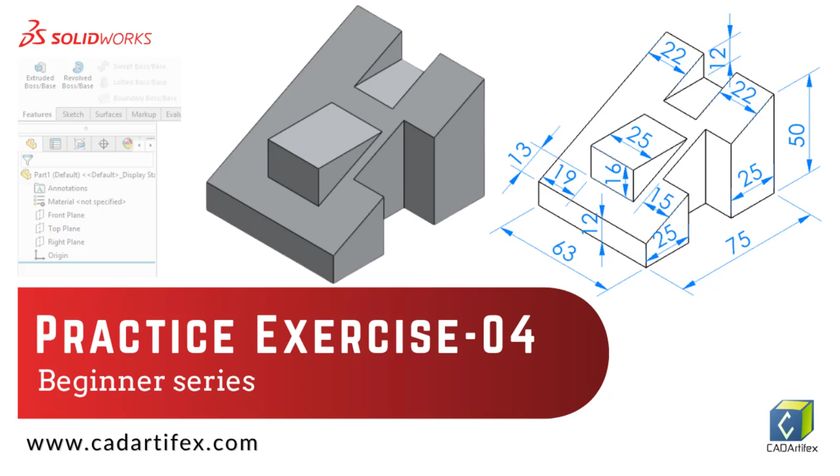Here's practice exercise 4 in our SOLIDWORKS Beginner series. This series is perfect for beginners or anyone looking to strengthen their 3D modeling skills. We'll start with the basics and move step by step into simple 3D models.

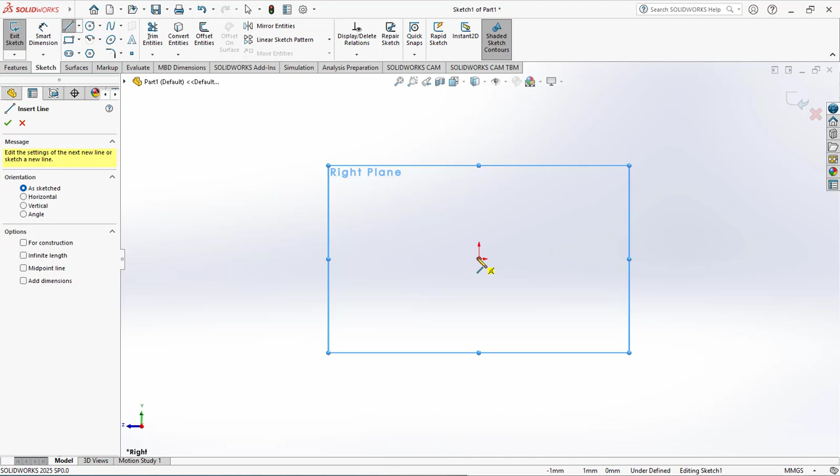Now let's start by creating the base profile. Go to the Sketch tab and select the Line tool. Click once on the origin to set the starting point. Then move your cursor to the right, and when the horizontal constraint symbol appears, click again to place the next point. From here, keep connecting the lines to form a closed sketch, similar to the shape we have shown in the drawing. Now let's add the dimensions.

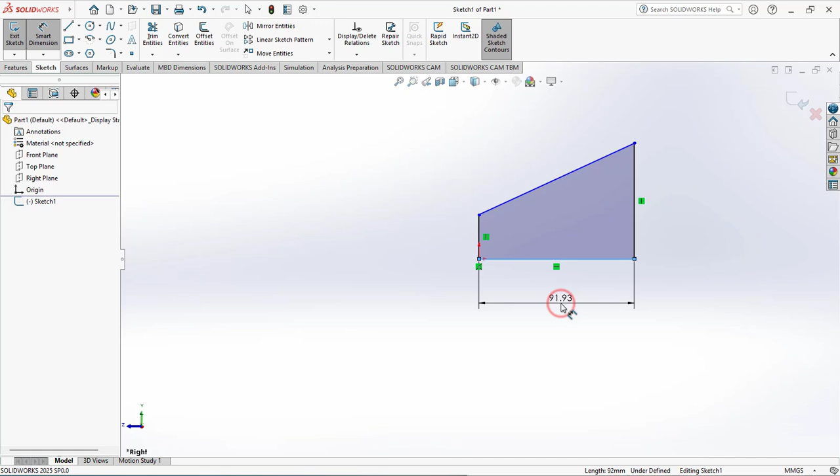Activate the Smart Dimension tool. Click on this horizontal line and set its length to 75 millimeters. Then click on this vertical line and set that to 50 millimeters. And finally, click on this small vertical line and set its length to 12 millimeters. Once you've added all the dimensions, take a look at the sketch. It should now turn fully defined.

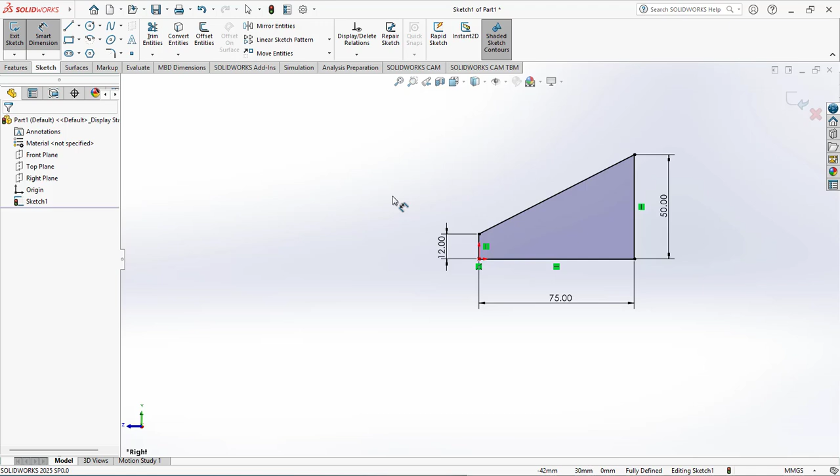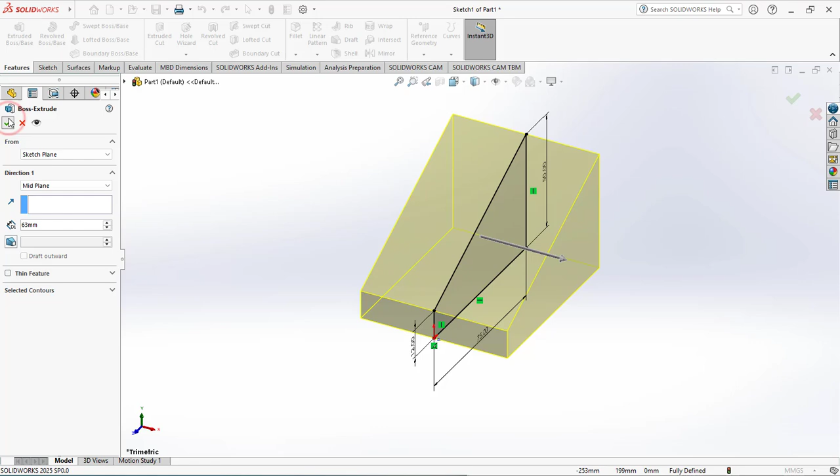Now, let's convert this 2D sketch into a 3D model. Go to the Features tab and select Extruded Boss Base. Under Direction 1 drop-down, select Mid-Plane and set the extrusion depth to 63 millimeters. Then, confirm with the green tick. And that's it. The base feature of our model is complete. From here, we'll move ahead and start building the rest of the parts step by step.

Now we'll move on to creating this cutout section in the base feature. If you take a look at the drawing, you'll notice this rectangular portion that needs to be removed from the center. You'll see that only the width is clearly mentioned, which is 15 millimeters. The length isn't given directly, so we'll position the cutout by taking 25 millimeters from this edge and 25 millimeters from the opposite edge. That way, the sketch stays centered and properly aligned on the base.

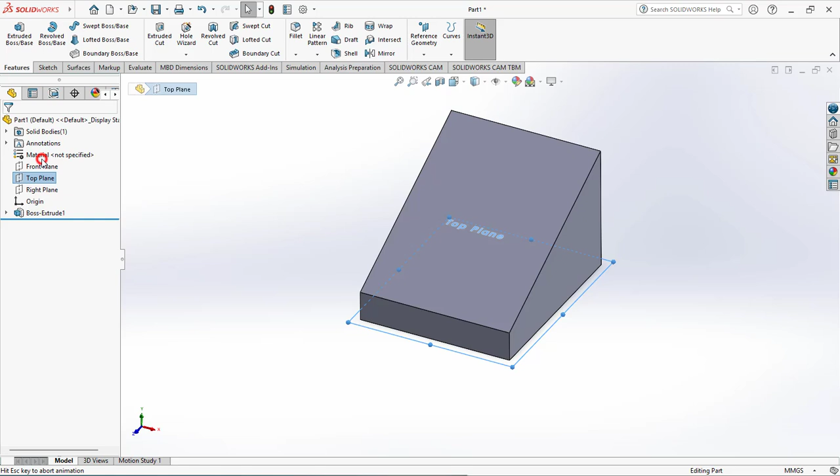Let's begin. From the Feature Manager tree, select the top plane and click on Sketch. Once the plane becomes active, it's now ready for us to draw on it. Now go to the Sketch tab and choose the Corner Rectangle tool. Move your cursor to the right side edge of the base. Click once to set the first corner. Then move your cursor diagonally and click again to place the opposite corner of the rectangle.

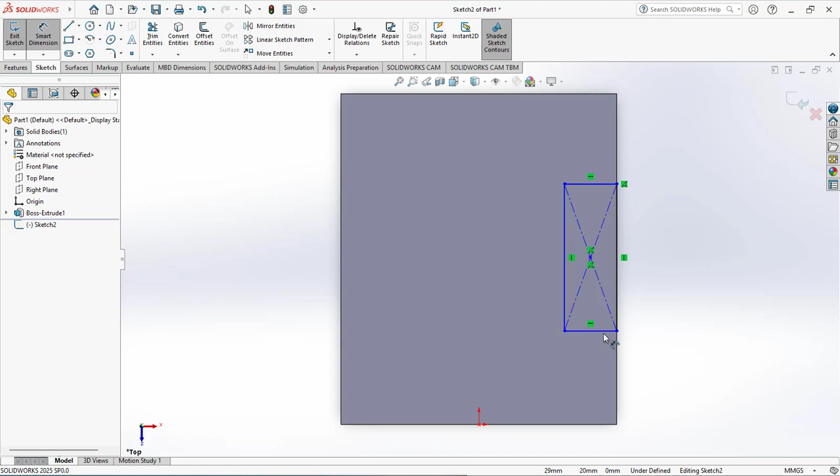Next, we'll define the dimensions. Set the width to 15 millimeters. Then, set the distance between this horizontal line and this horizontal edge of the base to 25 millimeters. And next, set the distance between this horizontal line and this horizontal edge of the base to 25 millimeters.

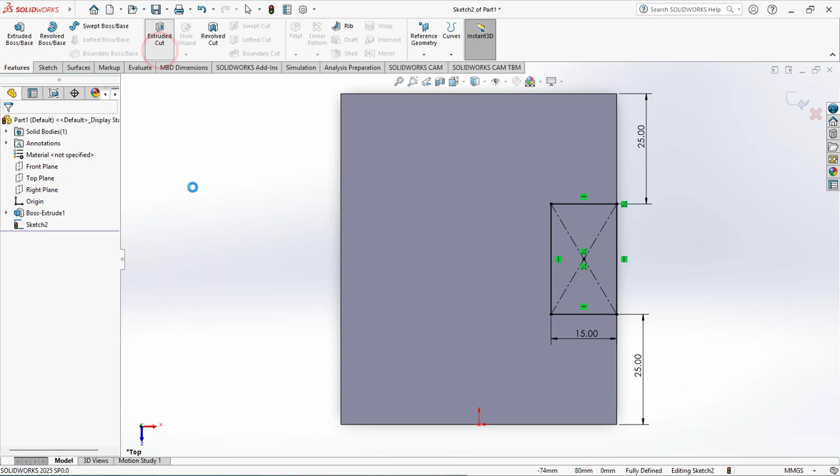Once all the dimensions are in place, the sketch will be perfectly positioned and fully defined. Now let's turn it into a cutout section. Go to the Features tab, select Extruded Cut, and under the Direction 1 drop-down, choose Through All. If needed, flip the direction to make sure it cuts through the full depth of the base, and then confirm with the green tick. And there we have it. The cutout section is now complete.

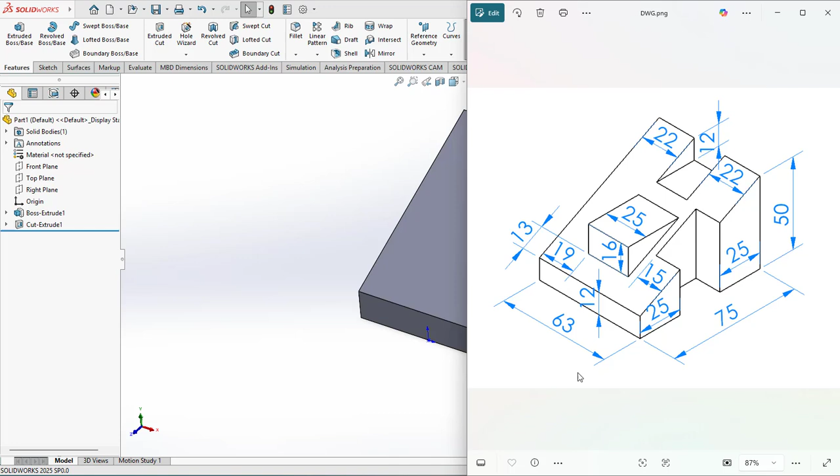Now let's move on to creating the next cutout section on the base feature. If you take a close look at the drawing, you'll notice this triangular area right in the center that needs to be removed. You'll see that only the height of the cut is clearly mentioned, which is 12 millimeters, but the length and width aren't mentioned. So you see, that's why we'll set the base feature on the midplane.

Now we'll create a triangular sketch for this cut and set its height to 12 millimeters. The cut will be made through the midplane. Since the exact depth isn't mentioned in the drawing, we can calculate it. The total width of the model is 63 millimeters, and you can see the remaining solid portions on both sides are 22 millimeters each. So, the cut depth will be 63 minus 44, which gives us 19 millimeters.

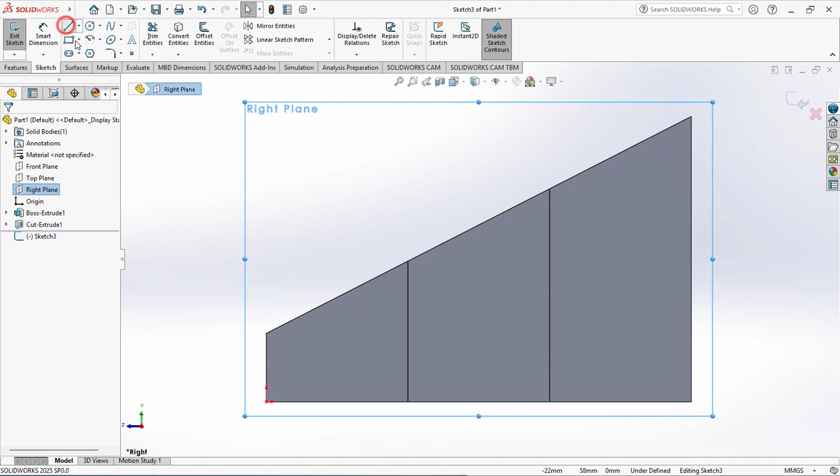Let's begin. From the Feature Manager tree, select the right plane and click on Sketch. Once the plane becomes active, it's ready for us to draw on it. Now go to the Sketch tab and select the Line tool. Move your cursor to the top edge of the base. Click once to set the first corner. Then move along, referencing the base edge to create the triangular shape, just like this.

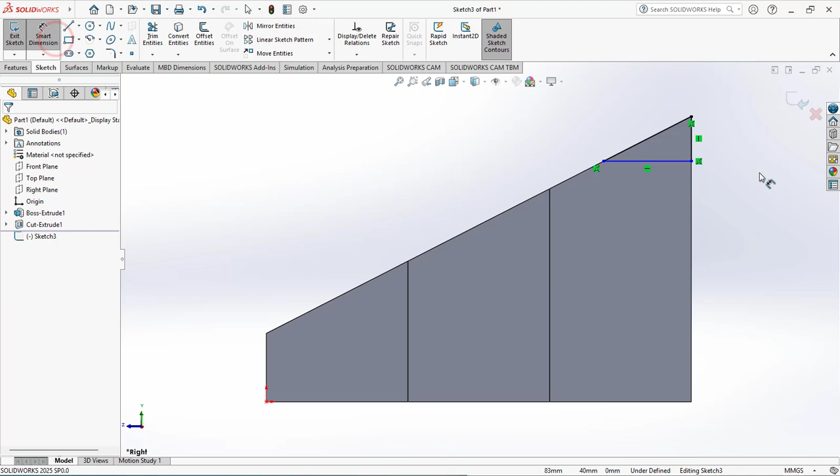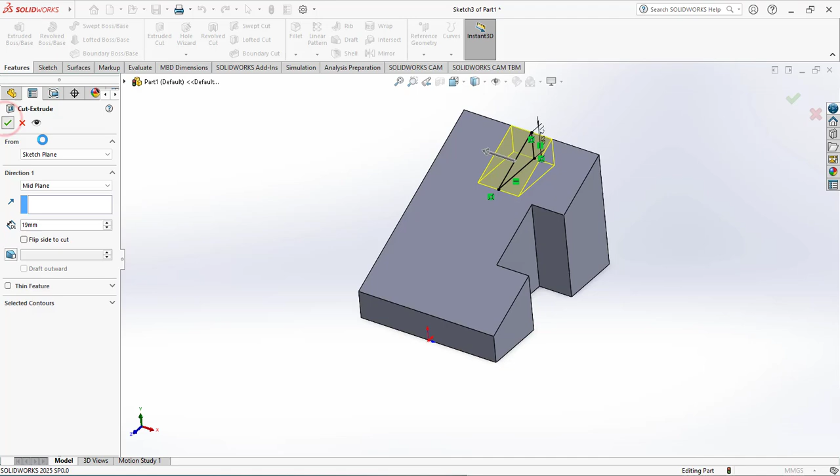Next, we'll define its dimensions. Set the height of the triangle to 12 millimeters. Once dimensions are in place, the sketch will be perfectly positioned and fully defined. Now let's turn it into a cutout section. Go to the Features tab, select Extruded Cut, and under Direction 1 drop-down, choose Midplane. Set the depth to 19 millimeters. Then confirm with the green tick. And that's it. The cutout section is complete.

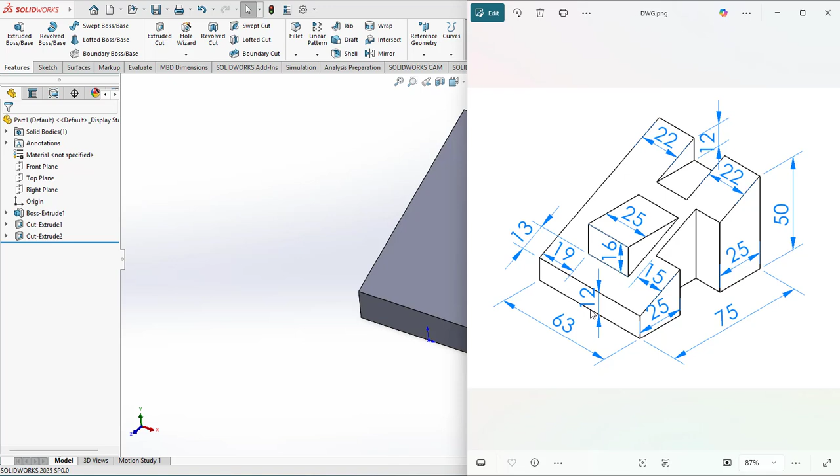Finally, let's add another extruded boss feature on top of the base. If you look at the drawing, you'll see that the total length of this boss is 25 millimeters, with a depth of 16 millimeters from the base. You'll also notice that this boss is positioned 19 millimeters away from this edge of the model and 13 millimeters from this edge, measured along the angled surface. To position it accurately, let's create a reference plane from the left surface of the model.

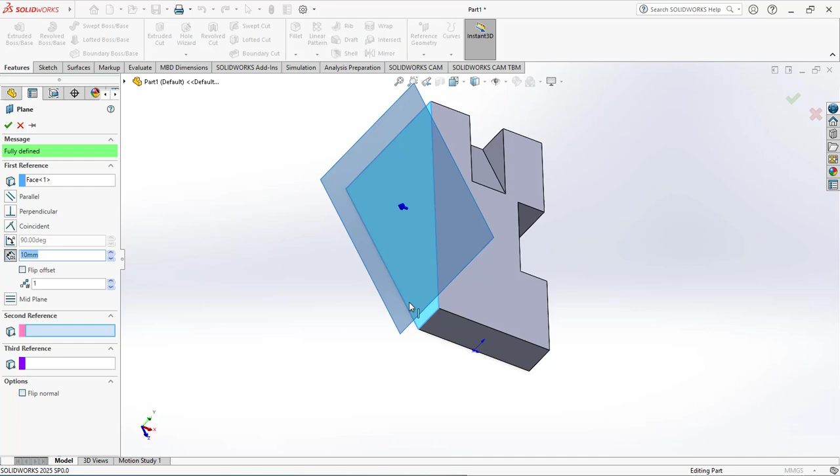Go to the Features tab, click on the Reference Geometry drop-down, and select Plane. Now slightly rotate the model and choose the left surface of the base as the reference. Enter an offset distance of 19 millimeters. If the plane appears in the wrong direction, select Flip Offset checkbox to reverse the direction. Once it looks correct, confirm with the green tick. Next, select the new plane from the Feature Manager tree and click on Sketch.

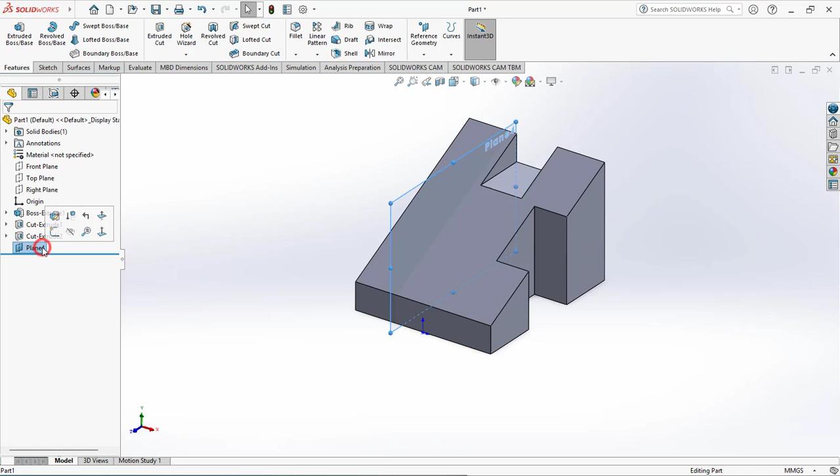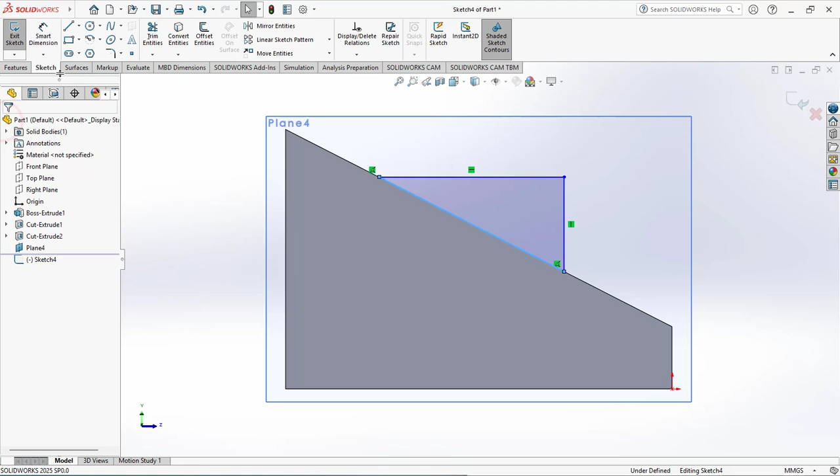Using the Line tool, start the sketch from the inclined edge of the base and draw a triangular shape extending outward from the base, just like this. Next, let's add the dimensions. Set the height to 16 millimeters and set the angular distance between the starting point of the triangle and the base edge to 13 millimeters. Once both dimensions are applied, the sketch should be fully defined.

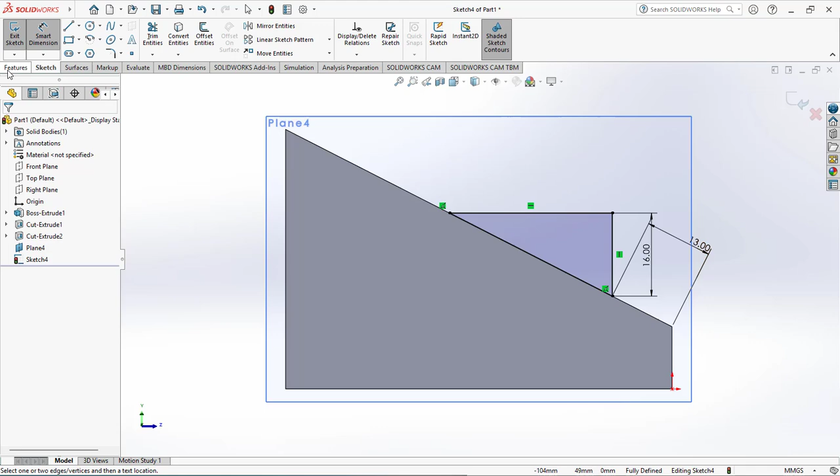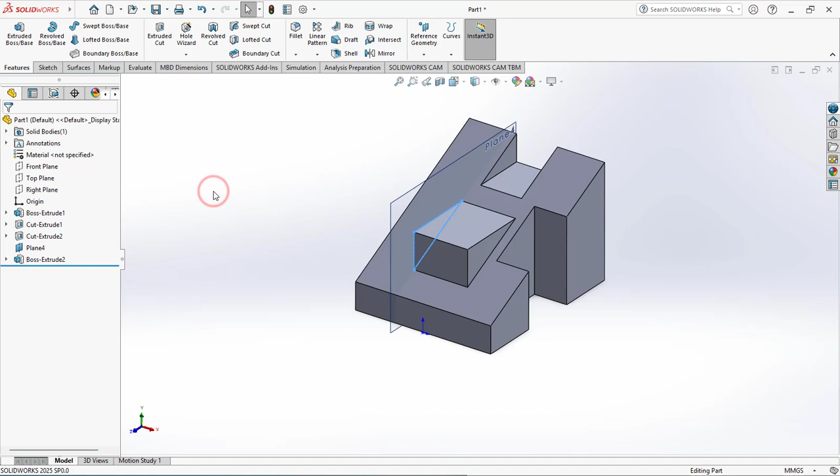Now let's turn it into a solid feature. Go to the Features tab, select Extruded Boss Base, and under Direction 1 dropdown, choose Blind. Flip the direction so it extrudes toward the center. Set the depth to 25 millimeters and confirm with the green tick. That's it. We've finished the model.